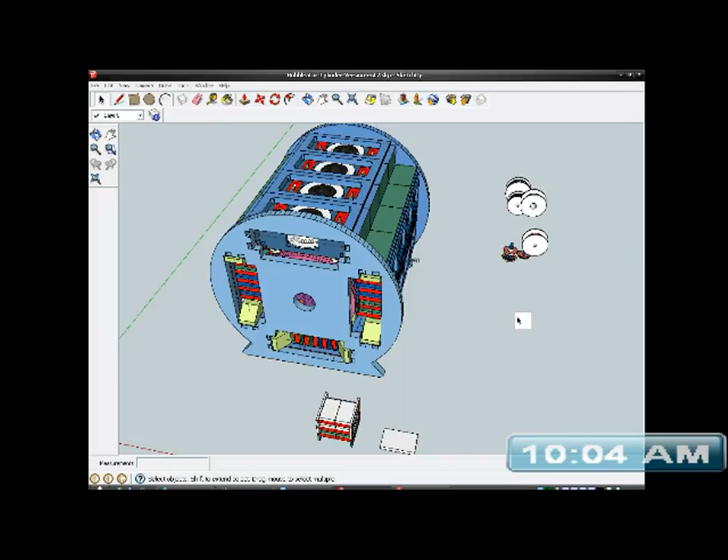So I'm starting from scratch with this mounting. Might as well do it next to my switch. I need to hide a few things.

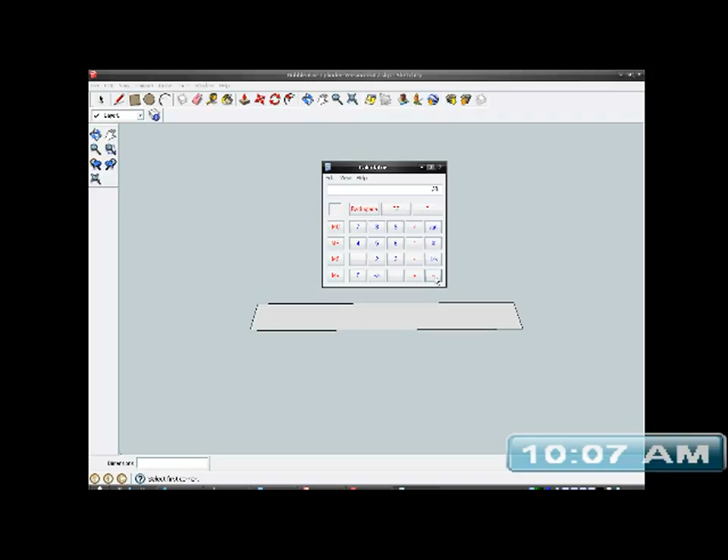Oh, damn it. I might as well hide that one as well.

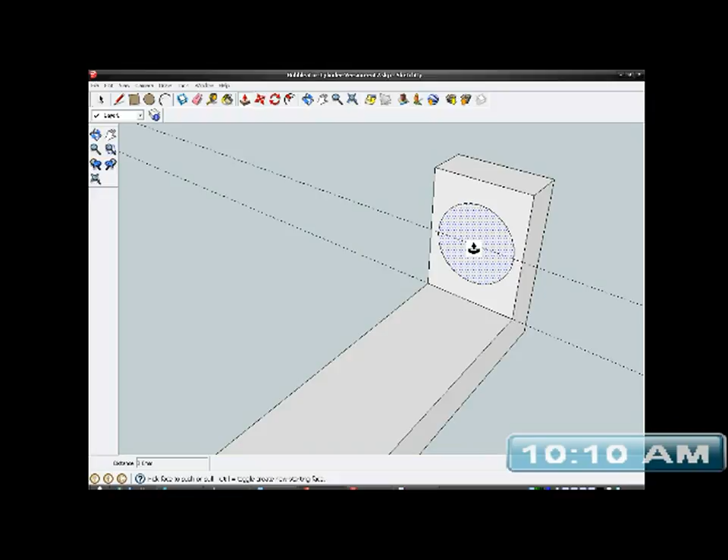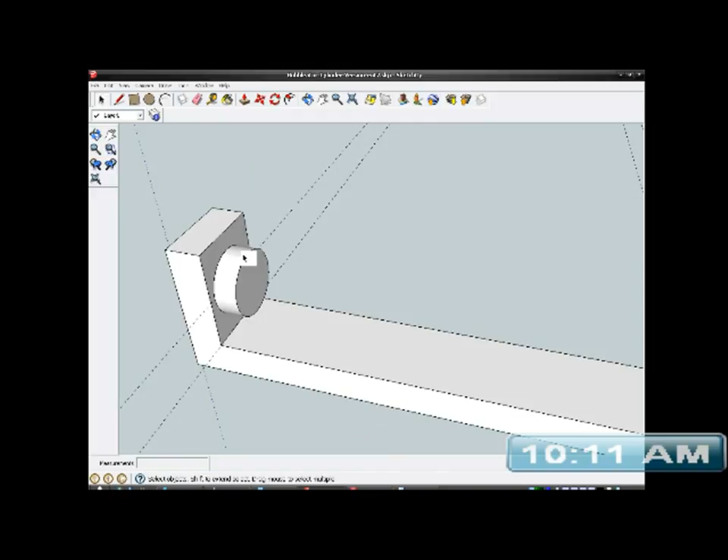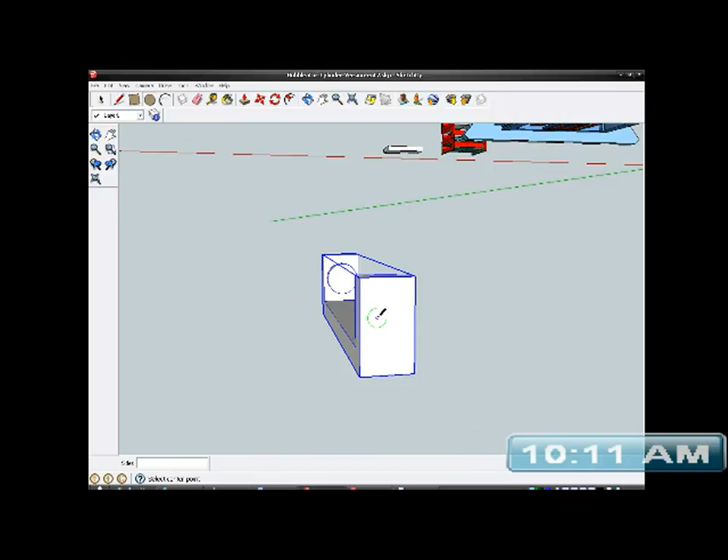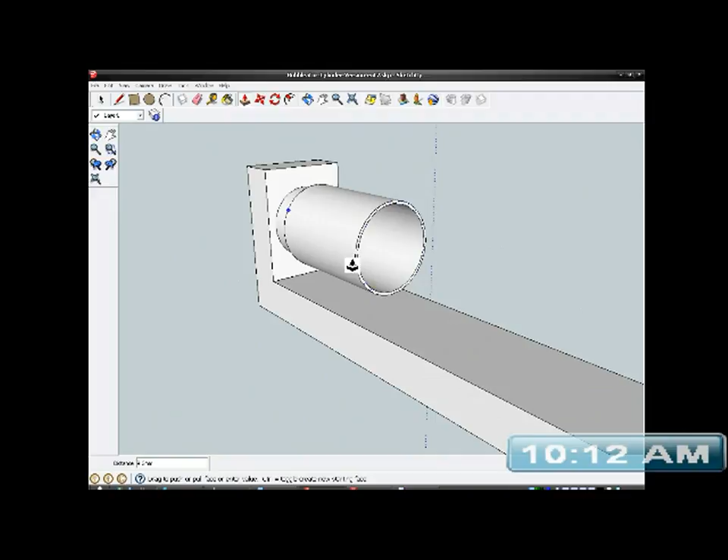So the tube basically sits between those pillars. Yeah, this is the tube.

I have to basically create the tube so I can make the other components that rest on it, the slider, the tapping, well, the variable control. It's going to rest on there. It's going to have coil on there, wire on there, so I've made it a fraction bigger.

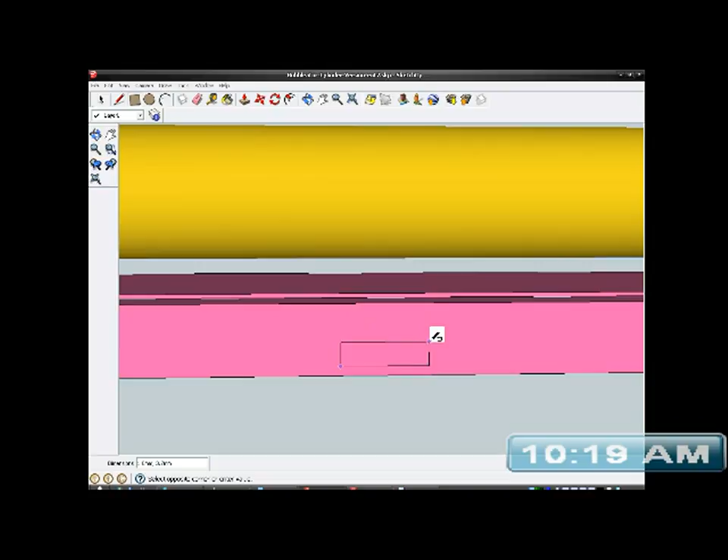So let's do a piece of rectangular material. I'll just draw it on the face of this. I want it to be 4mm, and my gap is 1.1mm. It's very thin, but it's going to be okay because I can make that gap a bit bigger. Actually, I think I will make that runner a bit bigger so it's not going to be too flimsy.

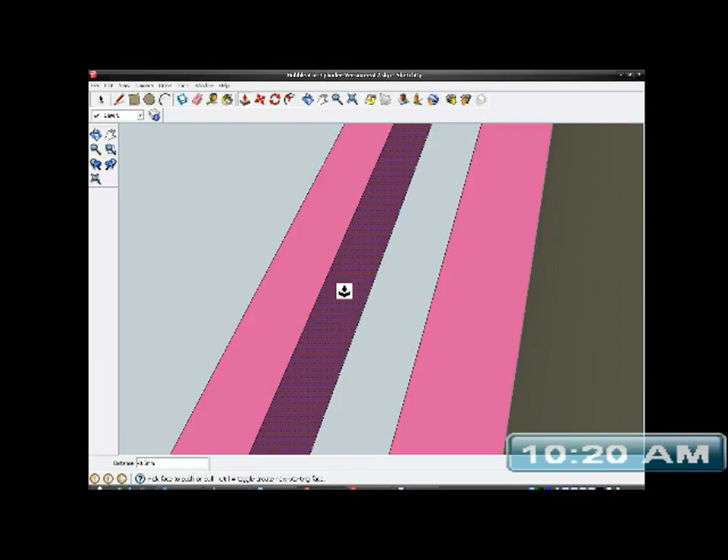So 0.5 on there. Let's have a look straight down. Yeah, that looks pretty good to me. So that should be about 1mm now, a bit over 1mm. It's 1.1mm. That's good enough. That'll work. So my material wants to be, hang on, two millimeters.

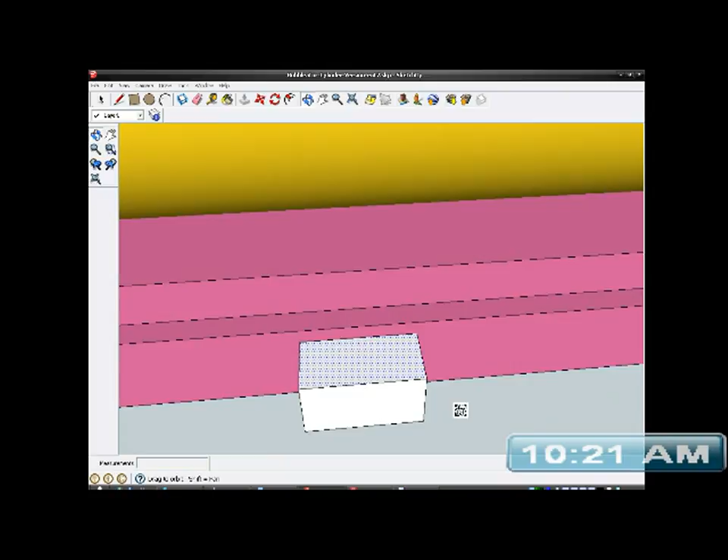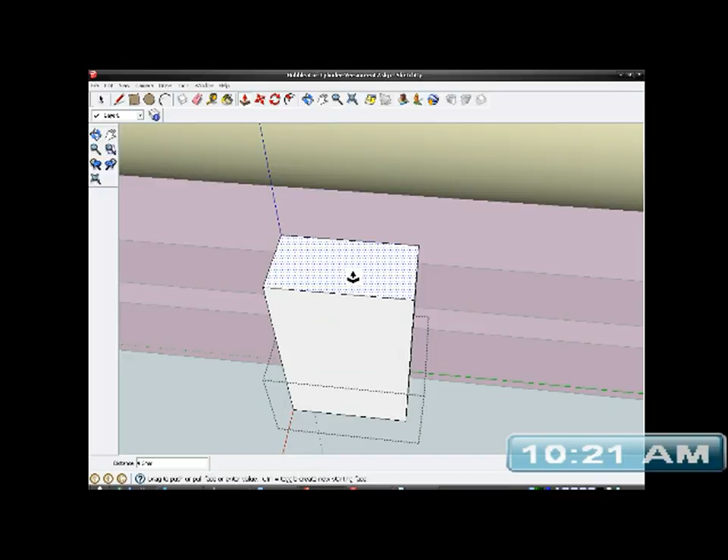I'm going to make that into a group. Edit group. I'm going to get a decent height, about the same height as that. Bring that down a bit.

Right, and I want to make a little slide thing to catch on to everything. So what I'll do is some recessing underneath as well, so it doesn't stick out.

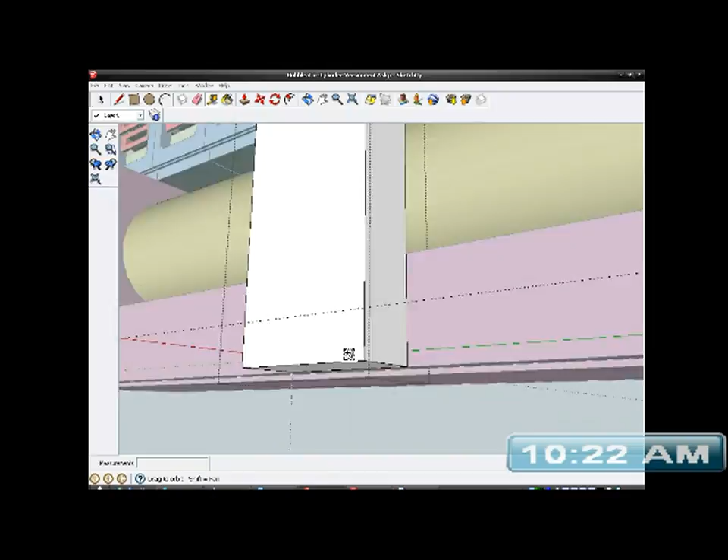So what I'm going to do here is put a lip about 1.2mm. That way it will snap into place basically. Pull it out by 1mm.

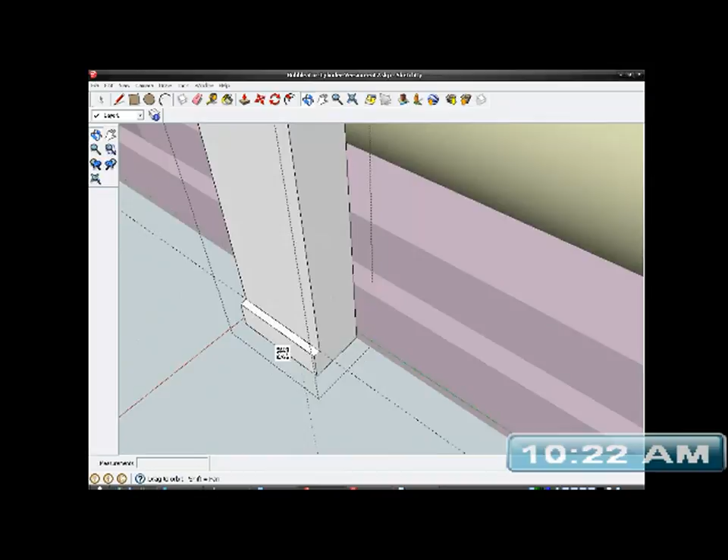That's a bit too much. Just pull it out by 0.3mm. All of this needs to be moved in a minute, so I'm just going to hide that for a minute.

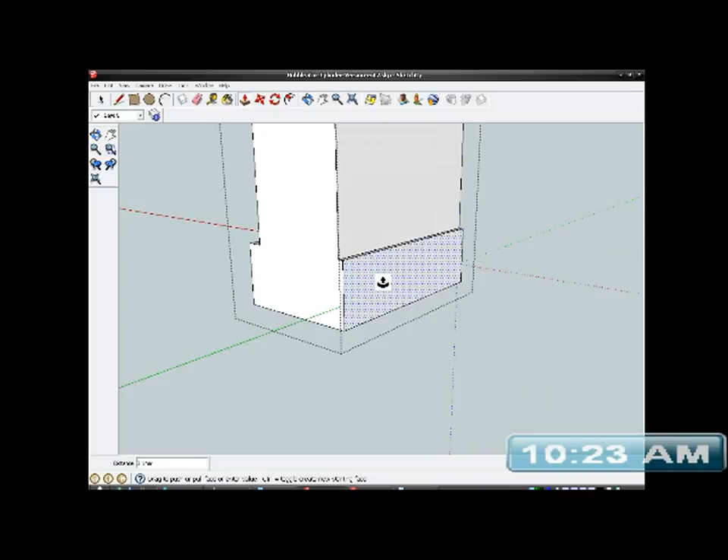I don't want this sticking out too much, as I'll never get it in, but that thing in the middle will spring, so this should snap in quite easily.

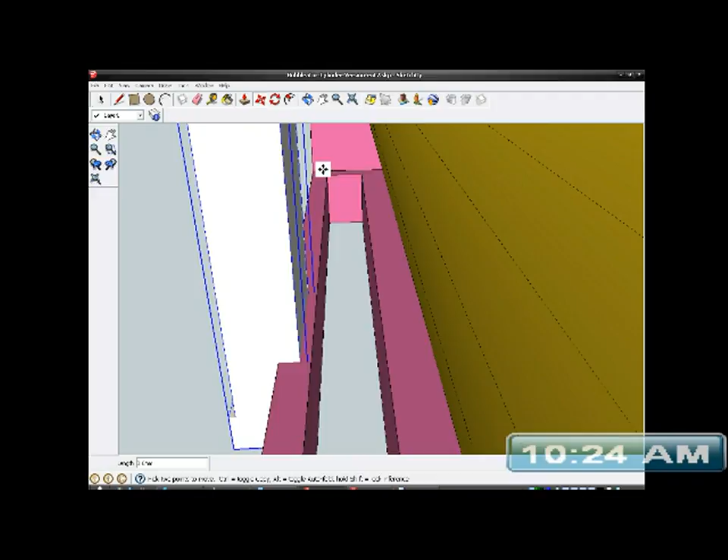All of this needs moving back now, by 2.9 millimeters. A little bit more. Good enough.

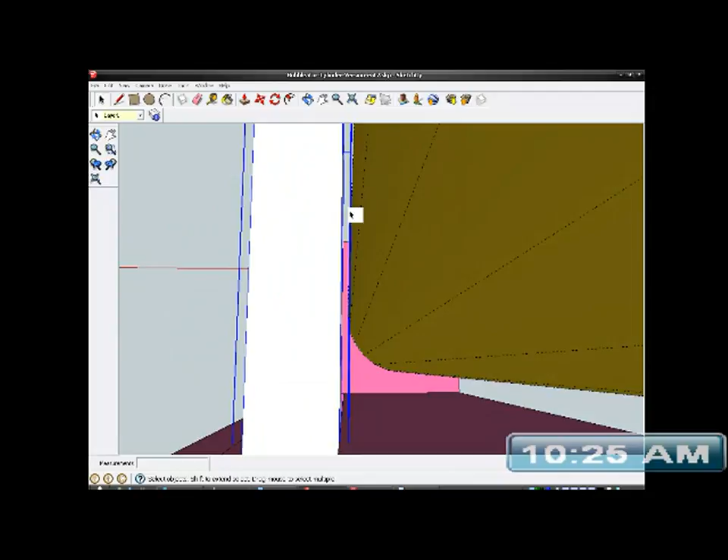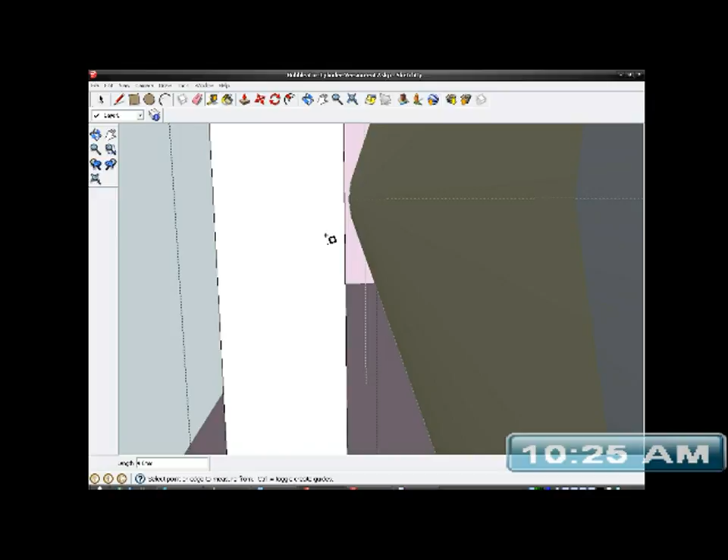So my contactor will be about here. Make a dot there, and a dot there. Hide that again.

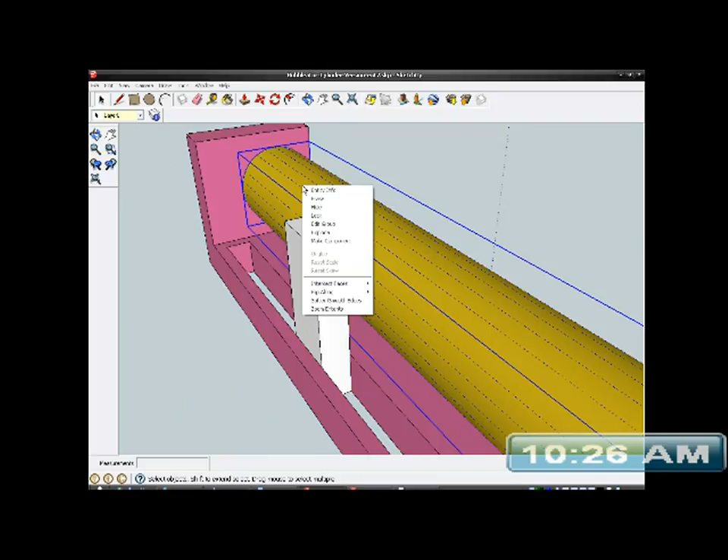So my contactor will simply be a piece of copper tape. How wide is that tape? I've forgotten now. But let's see, it's about 6 millimeters wide, but it's going to have a smaller footprint than that when I put it on here. So the total width of that is 4 millimeters, so it's not wide enough really for the full width of tape. That's okay.

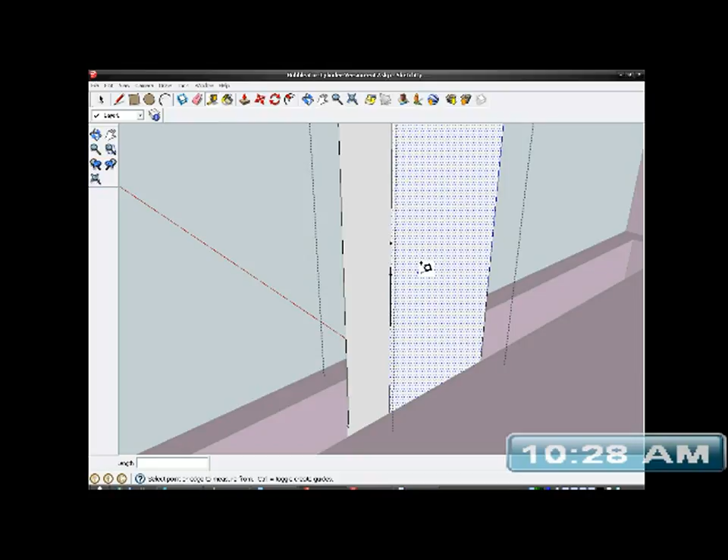I'll just make this a bit wider or something in a minute. Actually, I'll add 3 on there. What is that blue line for? Oh, it must be my axis. So we've got a 7 there.

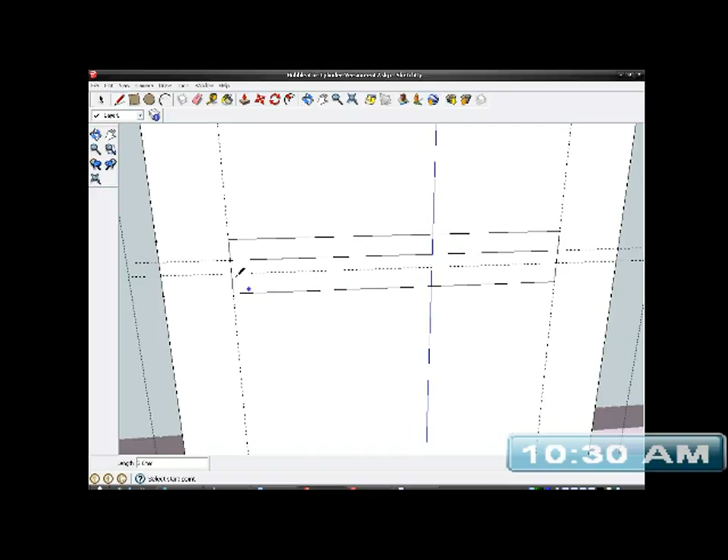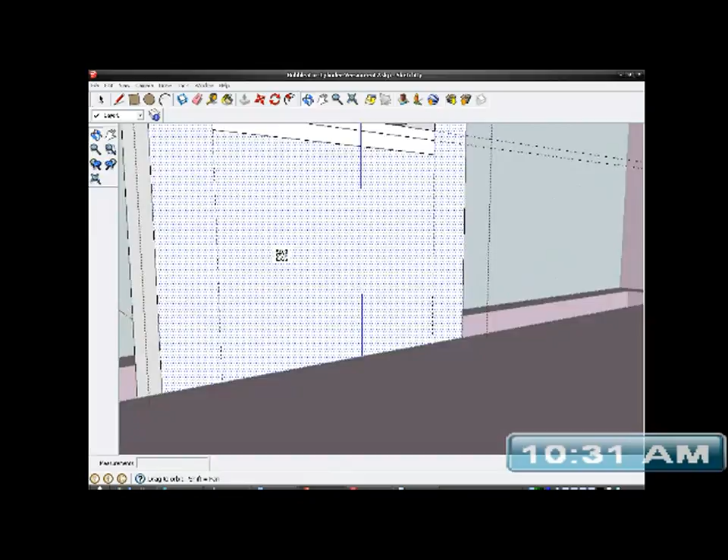It's just approximate for now. I can make adjustments in a minute. The tape just threads through that slot, and I'll make adjustments.

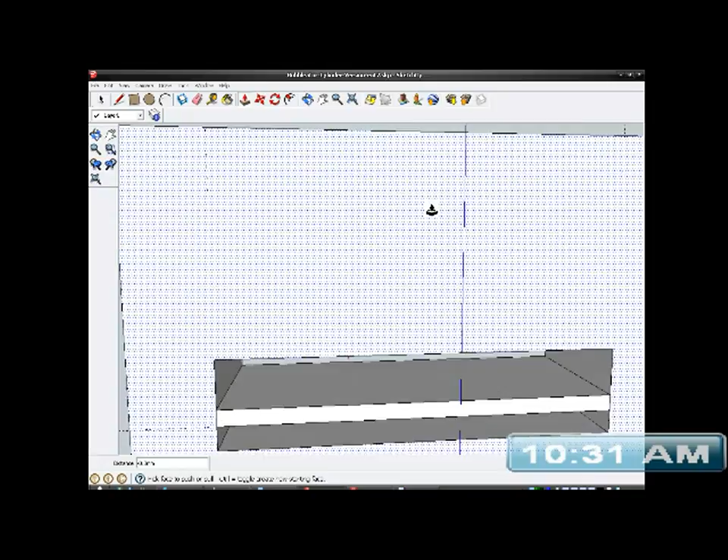So I want that a bit thicker than that, so I'm going to go up by 1. The tape's not thick, actually that's too much. The tape's very thin, so let's see about that. Yeah, I want to be up about another 0.3. Down by 0.3. I'll thicken this out a bit, it's a bit too thin. I mean, remember, this is very tiny, this thing is. Get a bit of perspective.

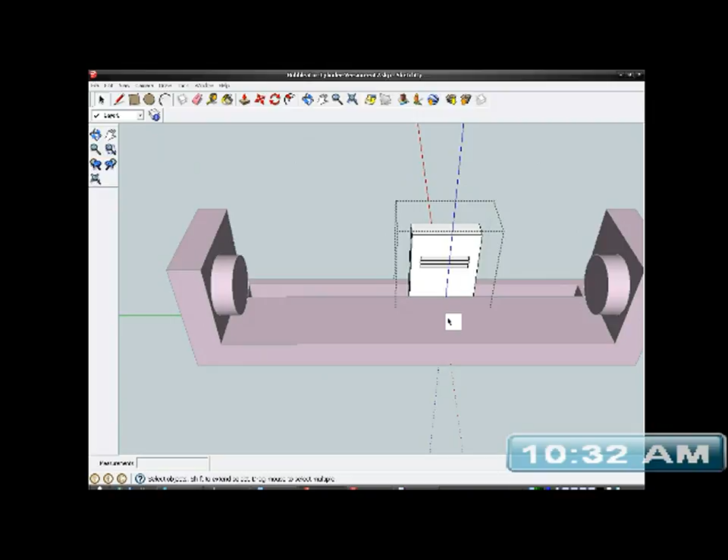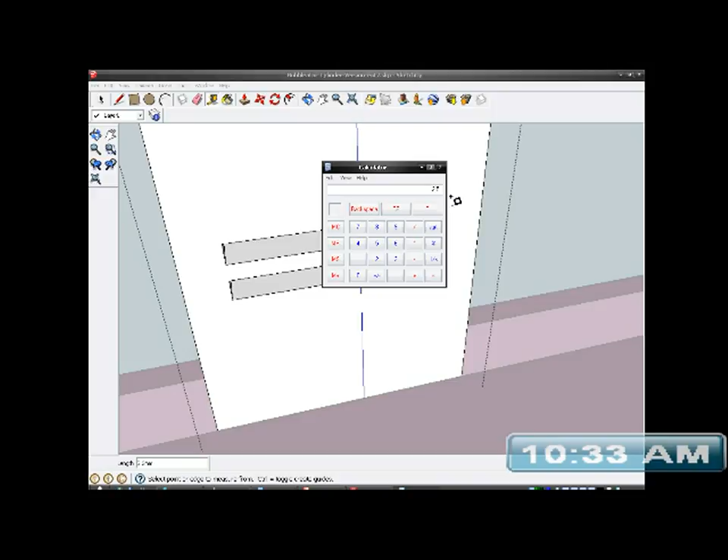So basically I'll just thread the tape round through there. I want a nub in the middle where the contact point will be. So, five millimeters, 5 divided by 2 is 2.5, so I'm going to go with 2.4.

And this will make the contact area. It will cause the copper tape to stick out at this point.

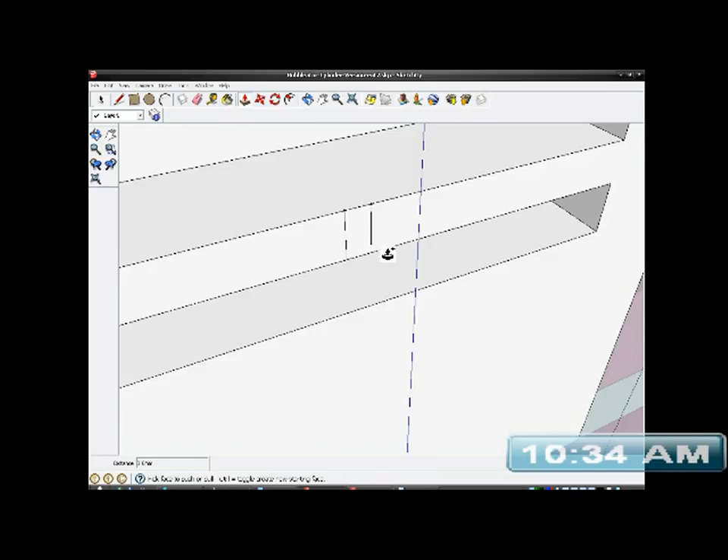I think that's too much. I want a slight point on it. Let me just check this width. I've got to print this out, remember. 0.2 millimeters, no, that's not going to work.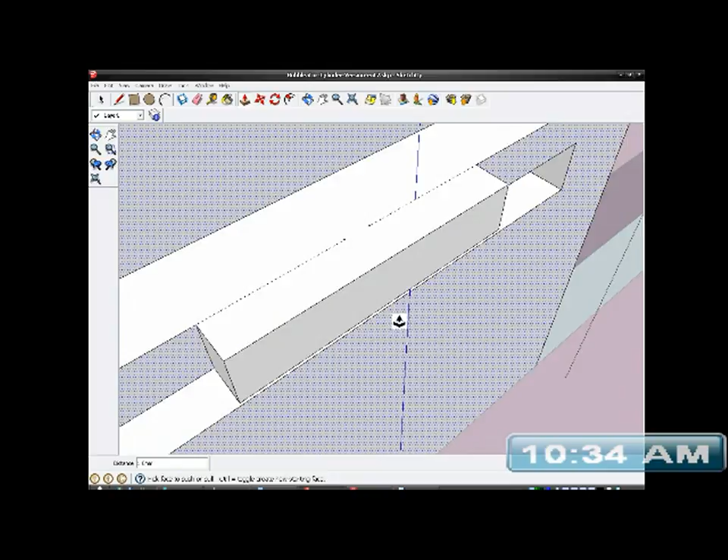So what I'll do, I'll bring this out by 1 millimeter. Bring this out by 1 millimeter. Right. Clear my guides, and I'm going to bring a point from the centre.

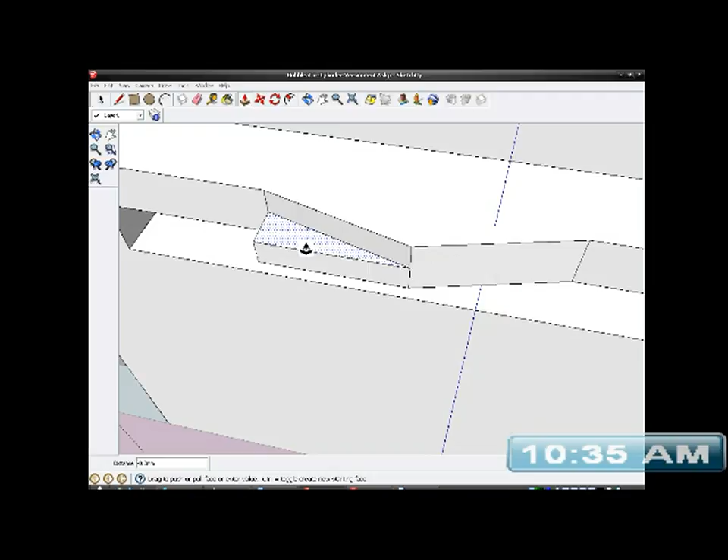There we have it. So that's going to push that copper into a point where I can have a contact point area. Because it's only copper tape, if it breaks or anything, I can replace it easy as well.

So that's my slide for the copper wire that's on the tube. There'll be a certain area of the tube where that doesn't contact, where it can't go all the way to the end, but that's fine because I'm going to allow for the extra wire.

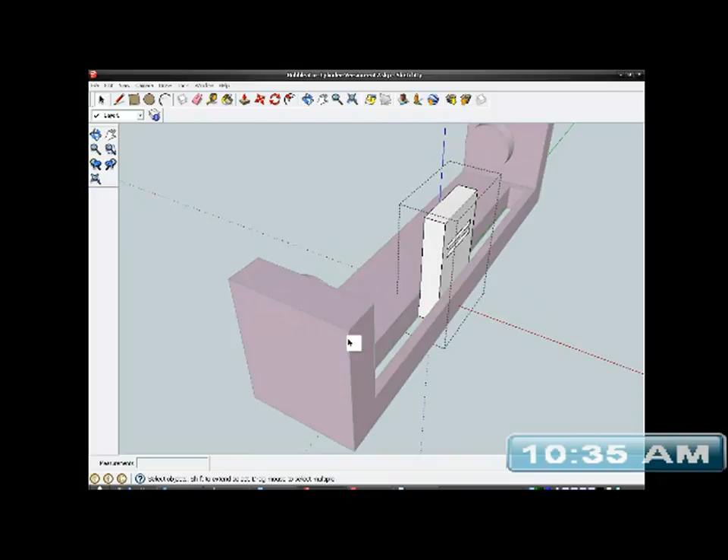So what I'm going to do there is I'll bring this lot back a bit. I'm going to add 3, and I'll recess that a bit.

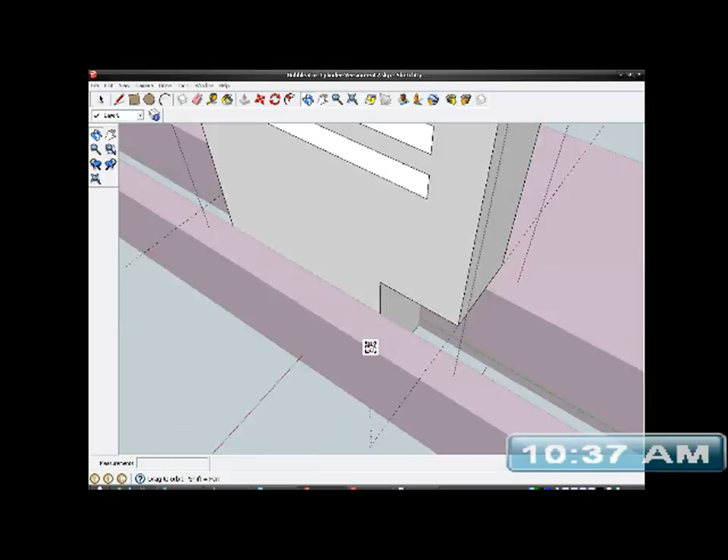I'll take that in by 2. Okay, way too much. Yeah, 1.4. Right.

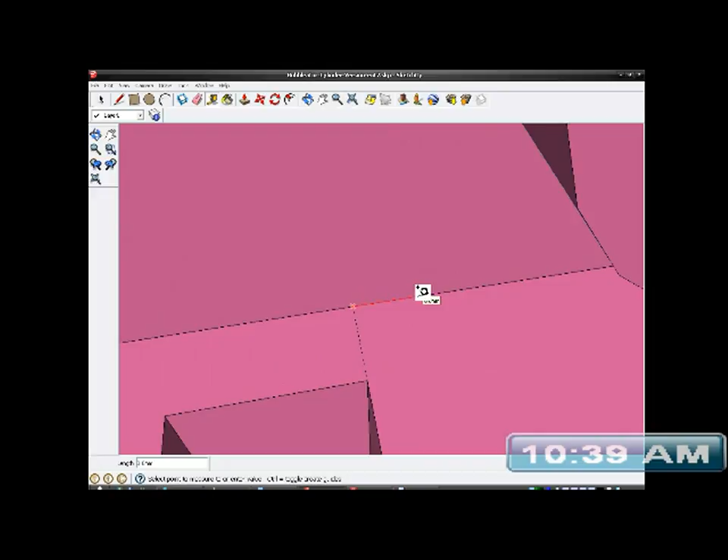Oops, wrong one. I want my ruler. Let's see.

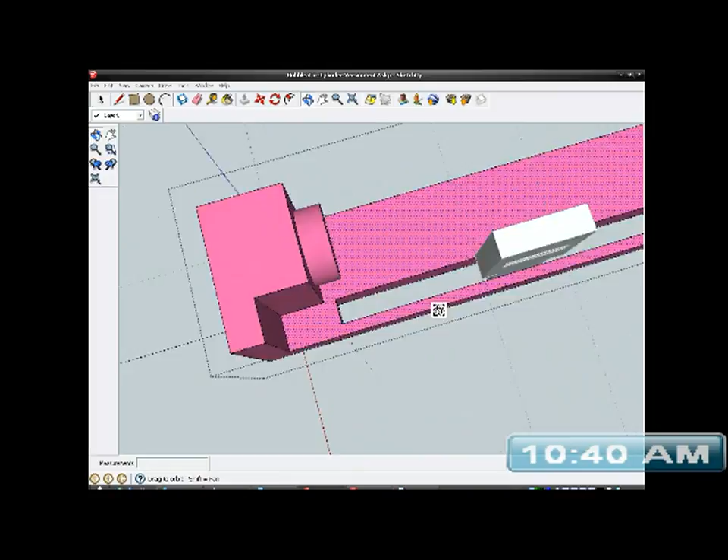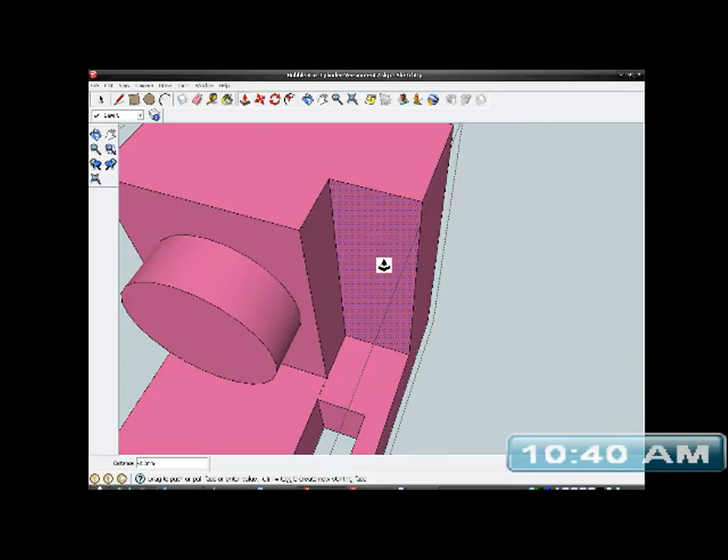I can't remember now how much I moved the other one by. What was it? 2.7 was it? Or 1.7? No, it's 3.7. That was it.

Right, so my runner can move further along. I can take this back a bit as well.

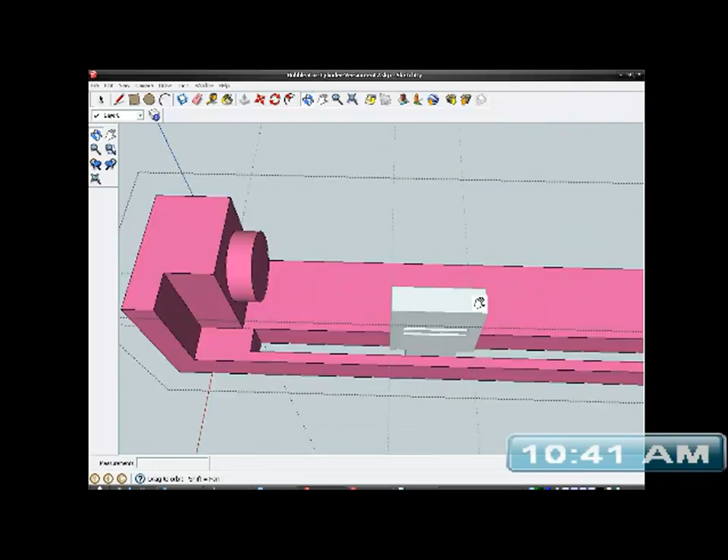So there should be enough back tension in the actual piece of plastic, but there's no worries about that. If it doesn't come into contact, I'll just put a spring on the base on the back of here to push it forward a bit.

So there we have it, and my copper tube - brass tube actually.

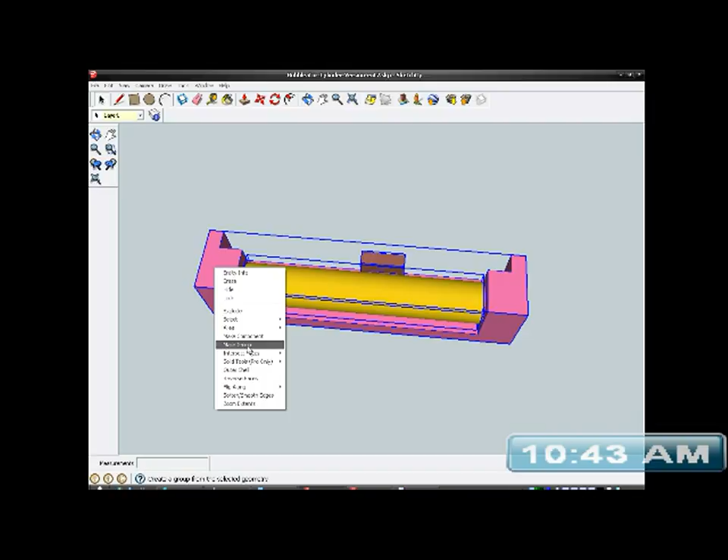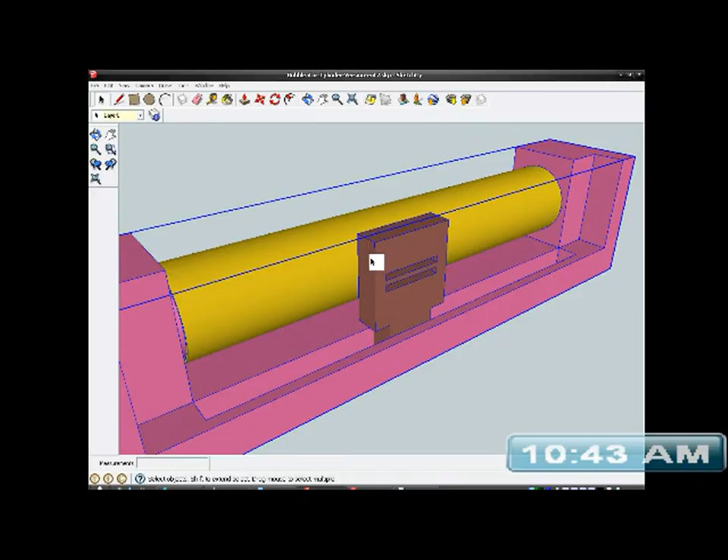So let's select all of this lot and put it in a new group, so it's all in one group, and that's going to be my slide attenuator. When the wire's wrapped around that tube, I could just move this along. This brown adjustment, I'll just slide it along to fine tune my delay line. And because it's a long piece of tube, if at some point I wanted to make it bigger, I could just stretch the whole thing out and make it longer, but I think that's going to work.

If you go and look back at old TVs, you'll notice that they have a delay line or variable resistors based very much on this design.

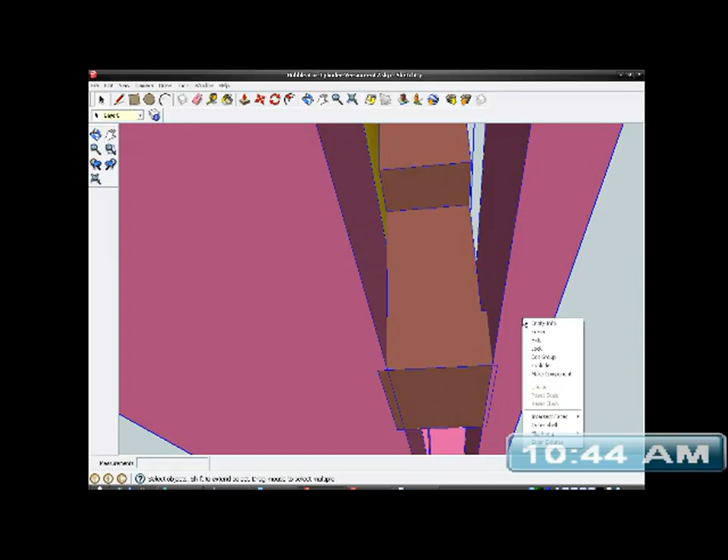So underneath, where these little lugs come out, I need to basically bring that up a bit. So, edit group, and I need to set it to 0.2 millimeters. 0.2 or 0.3, I'm not fussy.

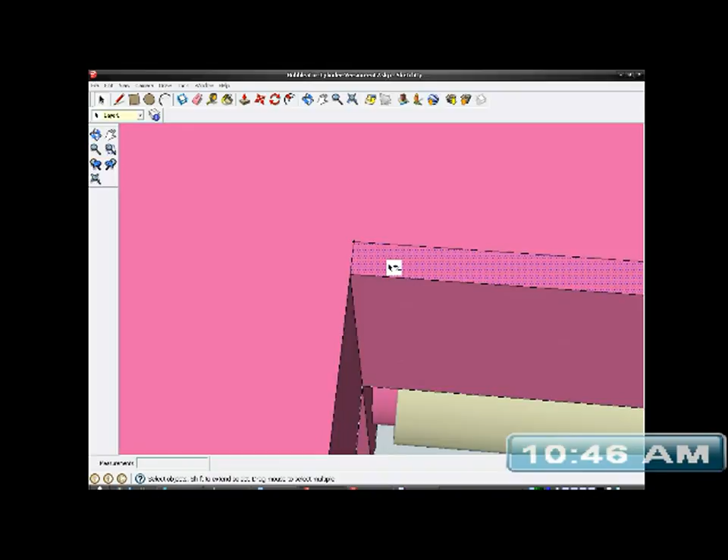I'll bring that down until I've got clearance for my thingy. That's my runner. I'll make it the same height as the other one. There we go.

So this will basically be a snap bit, it'll just push in. And I've got my runner there. And it's flush on the base, so it's not going to stick on anything.

But, just to make people happy, I could reduce the height of that a bit, but I think I'll leave it flat, because then it will run on a flat surface, it will keep everything vertical instead of tilting when I move it along. So I'm going to leave that as it is. I can always sandpaper that if I need to.

So that's the base sorted out. And the next job is printing all those components out.

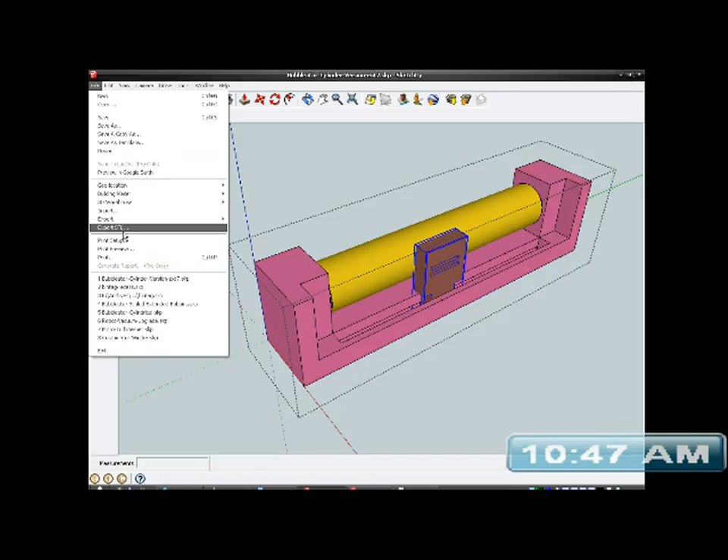Let's print all this, export it all. Basically print it and test it and see if it's any good. See if I need to make any changes to it later.

Come on computer. Oh, it's because I'm streaming, it's very laggy.

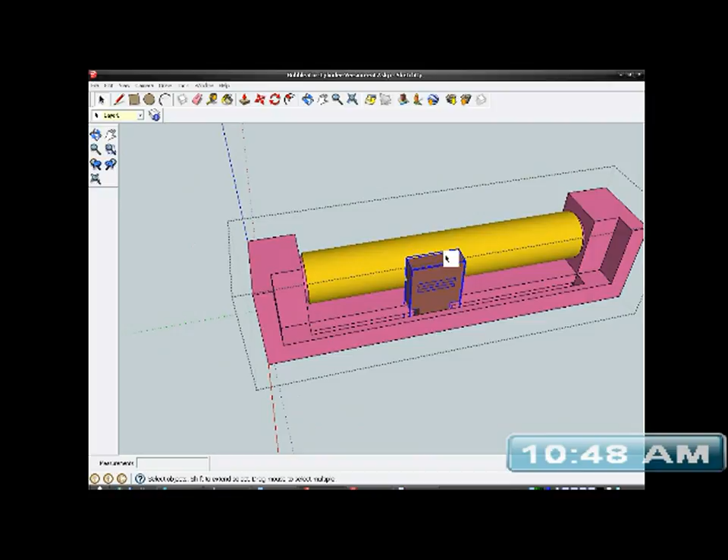I think I'll put this in another folder. Obviously I don't print the brass tube, but that's just for reference.

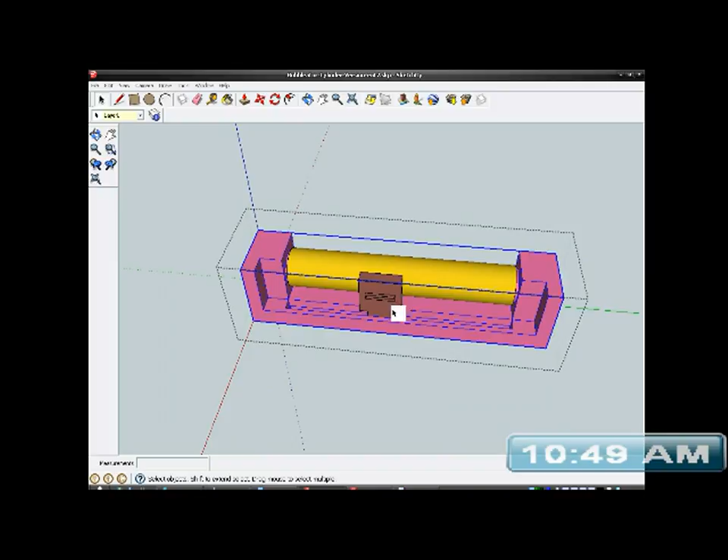I didn't make any holes for mounting it, any screw holes, because, well, I'm probably just going to super glue it onto the PCB.

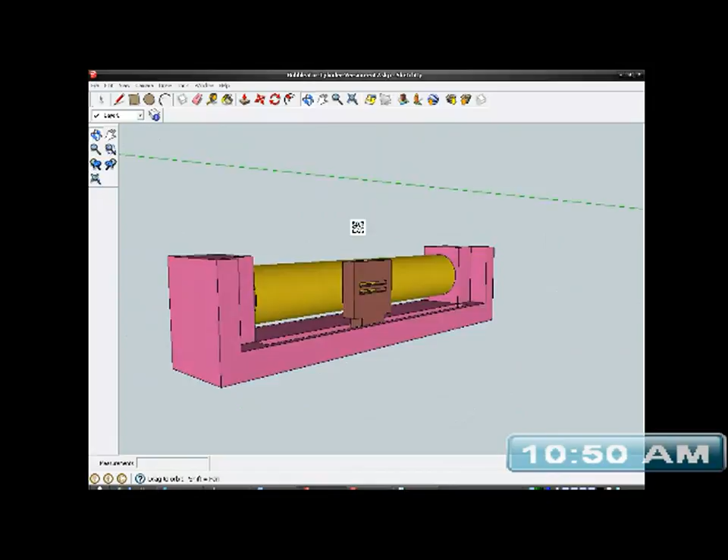I could have made some holes in this to mount it, but it's experimental, it's to test it, so I'm not fussy about holes. I can drill holes later if I need them. There's a large surface of body right here where I could drill holes if I needed to.

But also I could stick the whole thing onto a circuit board with double-sided tape, because this is pretty small. We're talking about from that end to that end it's 51mm, so it's going to fit on a circuit board without any problem. That is very small. Not very, very small, but it's small enough to fit onto the circuit boards that I've been making.

Or I don't even have to have it on the circuit board. I could mount it separately and just solder wires to it, solder the wires from the coil onto the circuit board. So yeah, so let's...

Have a look at what it looks like in the Sketchup program. I mean in the preview netfabb thing, see if there's any errors. So that's my contactor.

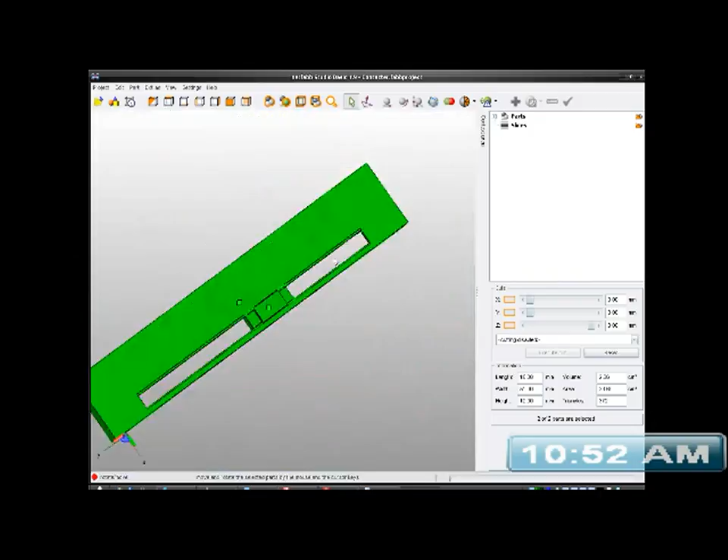It's actually very similar to those parts I made from my 3D printed cutting table. Some of the parts were very similar to this, so I don't see any problems with it really.

Right, that's it for now.